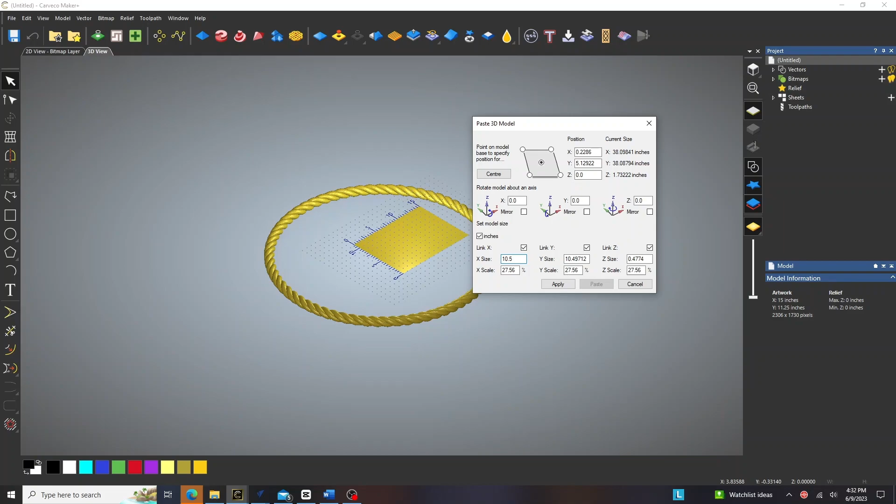Obviously this import's fairly large, so we need to make it fit our board. Our board is 11 1/4, but I'm going to cut it out. So let's go with 10 1/2 on this. And we'll hit apply. And we will hit center. That puts it directly on the center on the zero plane that you can see here. And the overall height will be 0.4774, which is fine because our walnut measured 0.582, so we're well within that area. So we'll go ahead and paste that down.

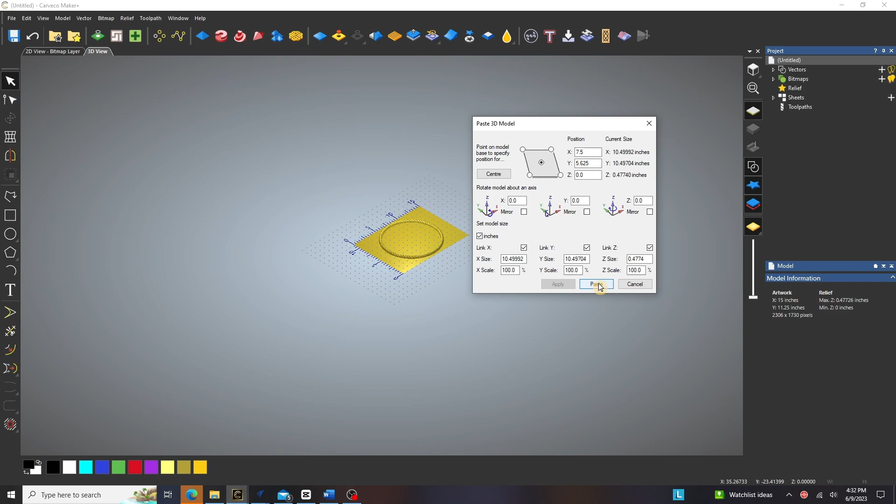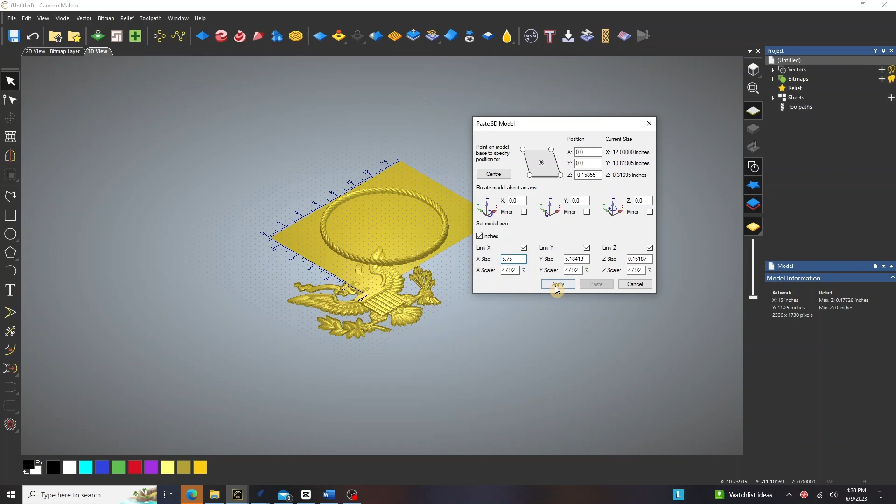Then we'll go in and bring in the U.S. Army logo. So we'll import another 3D model, and this time we'll do the Army symbol, and that comes in fairly large as well. I'm going to make it 5 3/4 inch, only because I'm going to be putting some text around the outside of it.

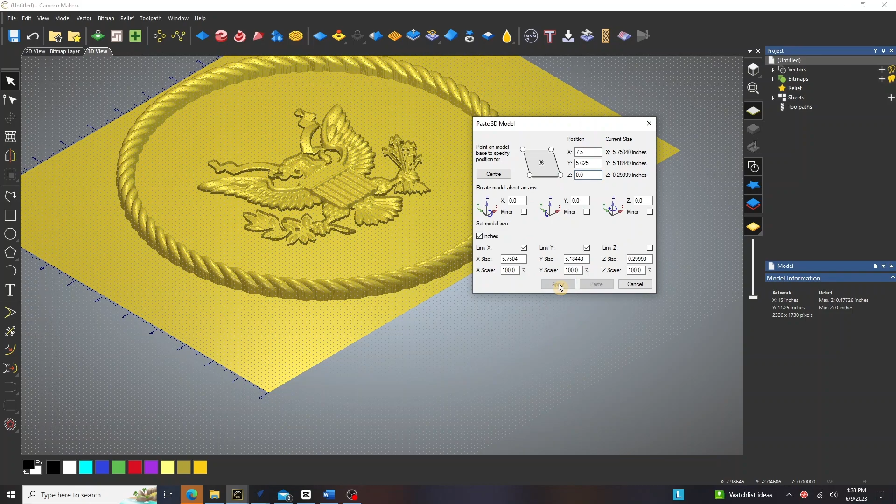So let's zoom in. That looks fairly thin there. It's only 0.151. So I'm going to delink the Z height, and I'm going to change that to 0.3. And we'll hit apply. Now when we did that, you'll notice here that it actually dropped below the zero plane. We don't want to do that. We want it on the zero plane, so we'll change this back to 0. We'll hit apply, and now we'll paste it.

Okay. So the last thing that we're going to do, I'm going to bring a head-on shot here. I'm going to bring in a vector, and we'll import a vector, and it's the U.S. Army. Okay, now we'll open that up.

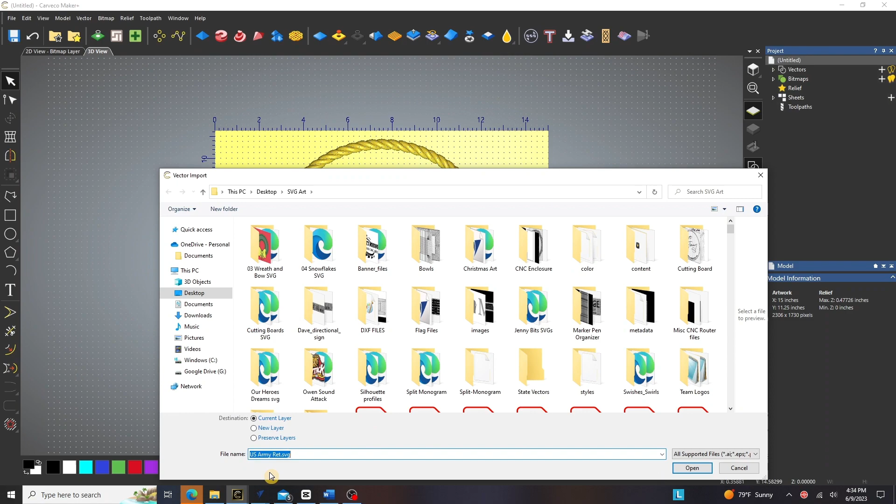And there it is. It's fairly large, so I need to try and fit it inside of that rope circle. Right now it's coming in at 11.5. I want to reduce that, and make sure your aspect ratio is locked. I'm going to reduce this down to, let's call it 9 inches, and see what that looks like.

That's fairly close. I'm going to just take that up just a little bit and make it 9 1/8. So 9.125, we'll hit apply. Okay, I like that. All right, so that's pretty much the 3D part of it.

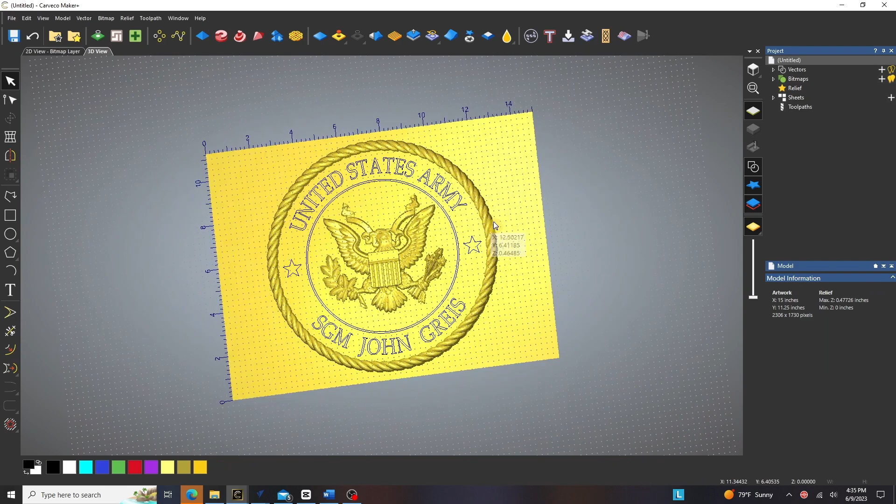We still have these vectors out here, and what I want to really do here is highlight the vectors and spend a moment just quickly to cover a really neat feature within Carveco Maker Plus, and it's the shape editor. It allows you to create a 3D from vectors. All right, let's select the vectors.

There we go. And we're going to put a start height, just a little bit of a base, just above the 0 plane, so 0.015. This will just ensure that it's into the walnut right at the joint line between the walnut and the aspen.

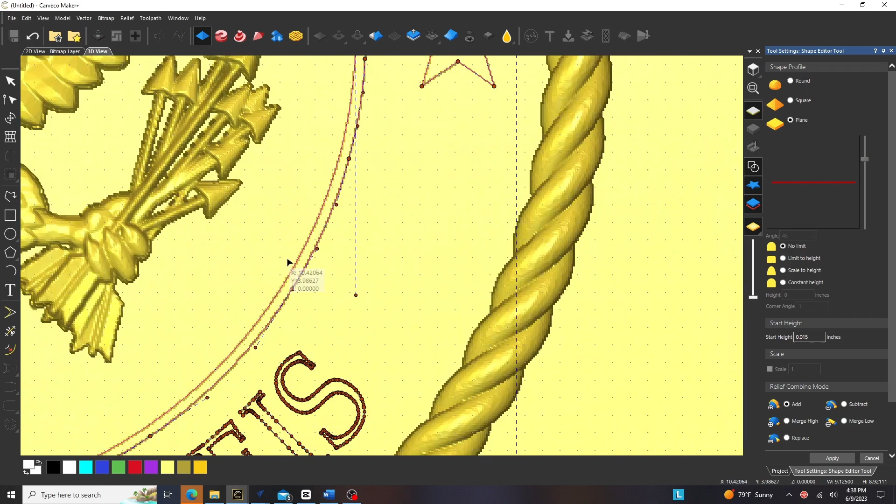All right, so now as you can see here, if we zoom in, it's a very thin raised part of the vector. Okay, and then we can go up here to the round, and that then puts a nice curvature to the top of that. You could make this as tall as you want.

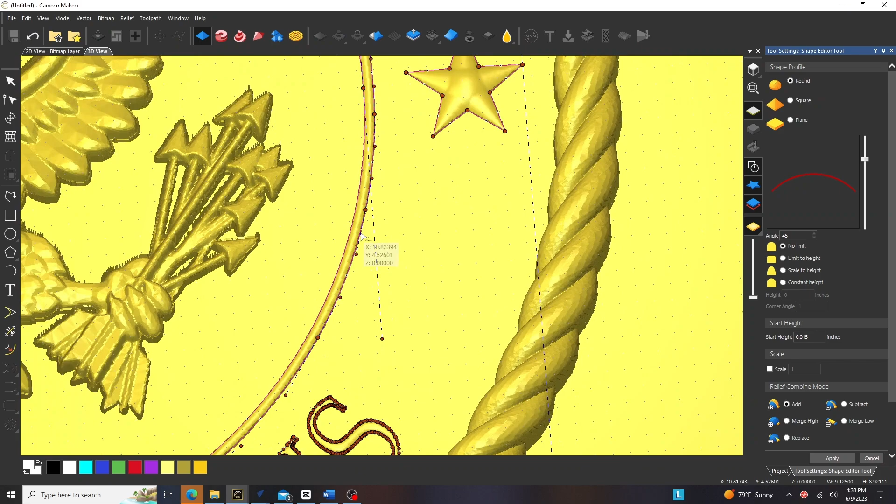But one of the things that we need to take a look at here is the shape of the stars. Just because of the way this works, it rounds every component and it compounds through the center area. We don't really want that. We want it to look like a real star, so we're going to do a contour blend on top of that.

You can see it's got a really nice curvature to it, but it's still pointing towards the center in all directions. So once we've got that there, we'll go ahead and make sure that it's going to be an add to the 0 plane, and we will hit apply. And once we've hit apply, that should be all there.

So now if we were to zoom in on the star, the text, you can see that it's all raised, and it has an appearance of, well, it is a 3D. So let's go ahead, and now the last thing that I want to do before we start in on the toolpaths, we'll cancel that window.

We will just create a boundary or vector around the relief itself. So we'll hit create relief boundary, and we will go ahead and create the boundary, and it creates a boundary around everything that sits above the 0 plane. Which is another way of checking to make sure that you've got a 0 plane.

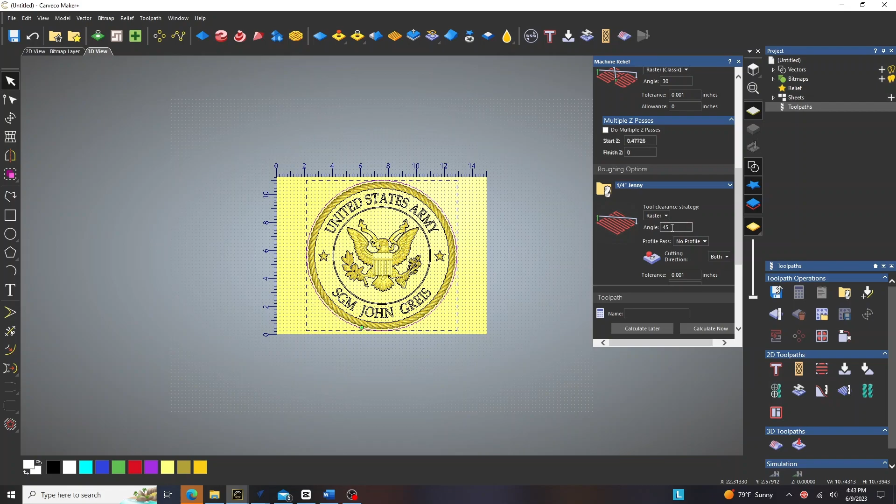For a roughing tool, we'll go ahead and use the 1/4 inch Jenny, and we've got that set to 160 and 80. I could run that a whole lot faster, but I'm going to stick with that for now. And we will raster this one at 45. And let's define the material. So first off, our material, we said 0.582 for the walnut and 0.748 for the aspen. So we add those two up, and it's going to be 1.330.

So 1.330. Okay. So at this point, I want to kind of stop here, because right now, if we were to carve it, we said that the walnut is 0.582, and if we were to carve it at that location right now, it would be well above the aspen. So this number, this bottom offset, needs to be the thickness of the aspen, or the lower material, which was 0.748. So I'm just going to type in here 0.747, just a hair under.

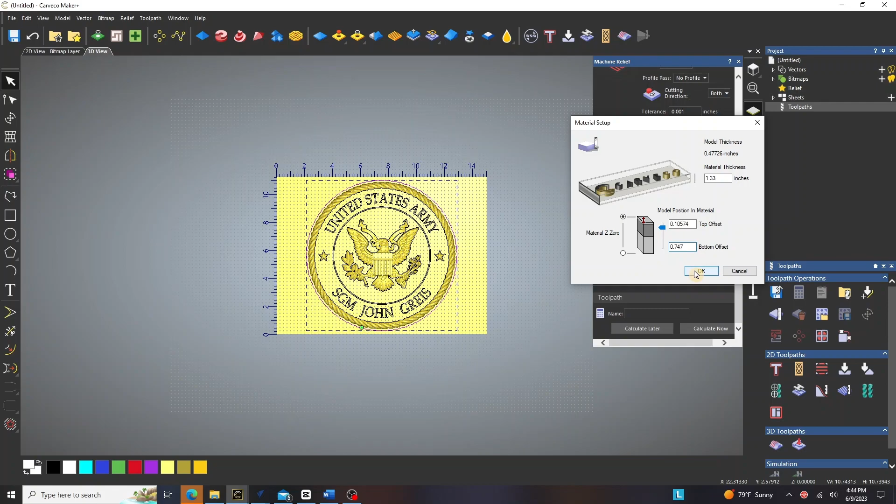Okay, and just so I can verify that with you, just go back to it. You'll see it's 0.747. The total relief height is this darker shade, and then any excess is above that. So when the relief gets down to the bottom, it's going to hit right at the surface of the aspen. So that will help. All of what I've done so far is applicable in Vectric. You just go to the material setup and select the similar looking window as what we have here.

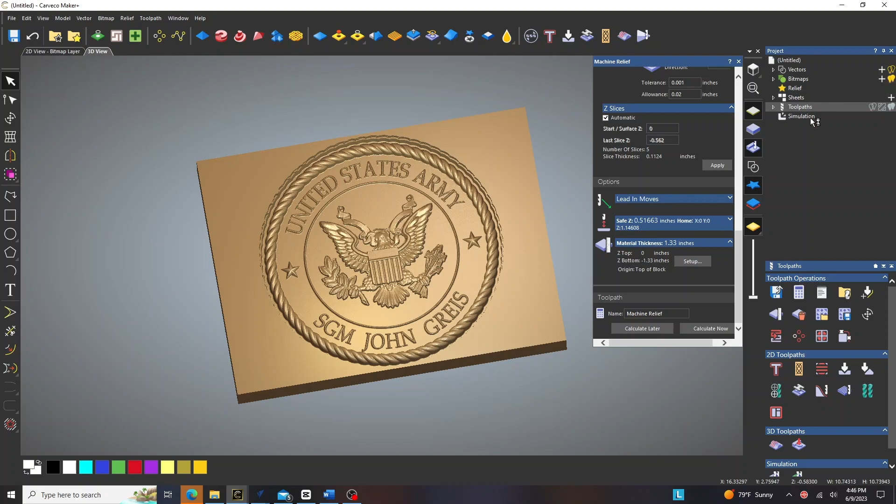Alright, so now that we've got that, we're going to go ahead and calculate this. Simulate all toolpaths. It's the roughing portion, and there's the finishing portion. So that's pretty much all there is to creating a 3D. Then the last piece that we're going to do is to cut it out. So let's go ahead and delete the simulation. We'll turn our vectors back on, and we'll get a top-on view. So we want the cutout to be to this vector, and so we'll select that, and we'll do a profile cut. So our start depth is going to be 0.

We want to cut all the way through the material, and we're going to use the 1/4 inch Jenny bit. And then I'm not going to add tabs. I'm actually going to screw the board down to my table, and I'm going to have some blue tape underneath the relief itself, so it's not going to pop off. So I'll do away with the tabs or bridges, but you could always add them if you want to. So let's go ahead and calculate that, and that's done.

So if we were to look at the whole simulation, it would look something like this. So you can see there that the piece is all cut out, and anything in the background is going to be the aspen, everything in the foreground is going to be in walnut, and that'll make it really stand out. Alright, so the last thing we do is we save the toolpaths. So let's go ahead and do that real quick.

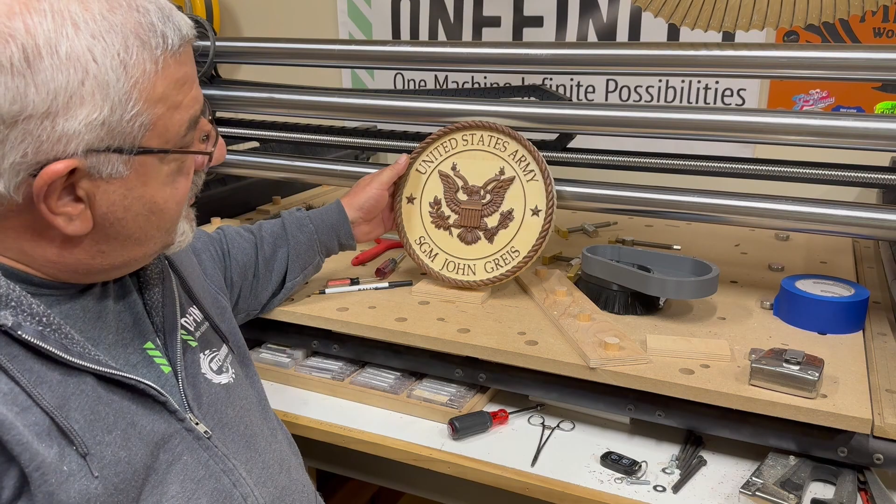So there we are. We've got the piece finished off. It's been coated. I've got a keyhole slot in the back, and it's ready to ship out. Keep in mind that this process can be done with either 2D or 3D. If you're doing a 2D design where you want your design to stand proud of the different colored material, just set your depth to carve to the top of the background material, and it'll carve out just the same way. It'll leave that light background, and your design or text sitting proud would be the darker material, or vice versa.